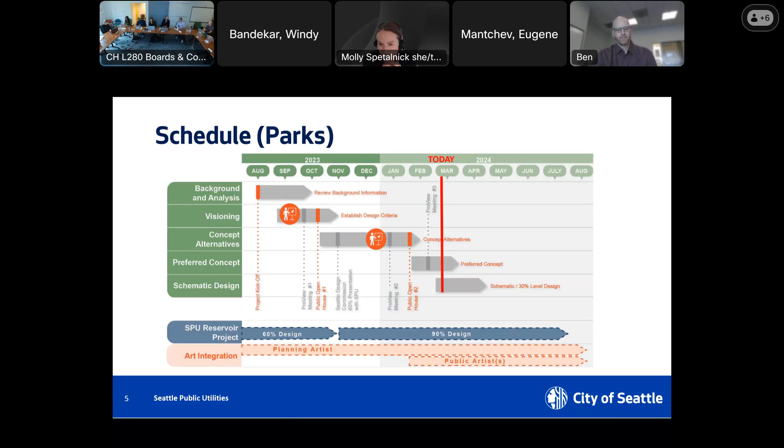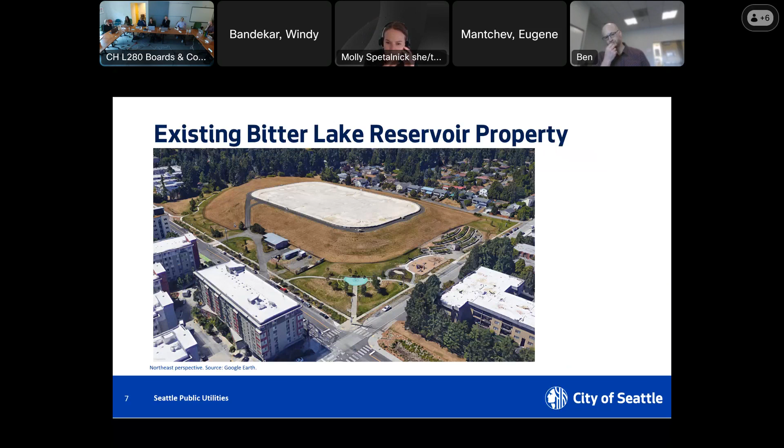And you can see the existing reservoir is built up as an earthen basin on all sides, with a floating cover on top of it right now to protect water quality. And that will all be removed as part of this project.

So a bit on site constraints and opportunities. As we noted, there is city right-of-way on three sides of the project, and then to the west, sorry, that's on the bottom of the sheet, that is Fremont Street North, private residences, and Pleasant Street there. Currently the site is fully secured. That's the large dashed line. It's security fencing installed by SPU, but we will now be removing that as part of this project and opening up the space for public use.

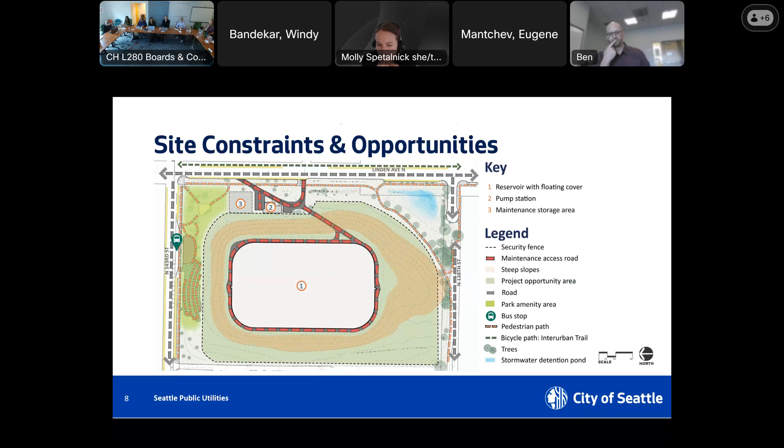We do have large elevation gains that have caused concerns for accessibility, coming up from the roadway grade to the maintenance access road around the reservoir, over 30 feet. And then we also need to be sure with the removal of that fence that we're also improving the water storage security as well as the seismic survivability of the water storage facility.

So to take a step back to some work that we completed in 2021, and then even talk about some work that was done by SPU at a highly conceptual phase back in the late 2010s. We are aware that this is a unique site that offers unique opportunities to the city. It's very rare that you would have a 14-acre parcel with new dedicated public open space become available in the city. I want to note that SPU has been a thoughtful, collaborative, and intentional partner about the design of this new critical infrastructure and the space being provided to the city and to the Bitter Lake community.

So highly conceptual work began in 2017-2018 by SPU. The early outreach efforts we had then were before Consor was even brought onto the project. But SPU learned that both the neighborhood and local law enforcement were not interested in having a fully buried reservoir here. Like similar locations where SPU has water storage facilities that are fully buried, you can't plant trees or shrubbery on top of the reservoir because of potential harm to the structure in the future. And so neighbors saw this as a high potential area for what they were already seeing as a large number of encampments on this property.

And law enforcement agreed that with the difference in elevation from the street to the top of that reservoir at plus 40 feet when the structure is complete, this would not be an easily patrolled area. So there was concern about just creating a large potential campground on top of this reservoir. And then there were also concerns that if we were to fully bury this, there would be accessibility concerns, particularly for the senior housing that's directly across Linden Avenue from the reservoir site.

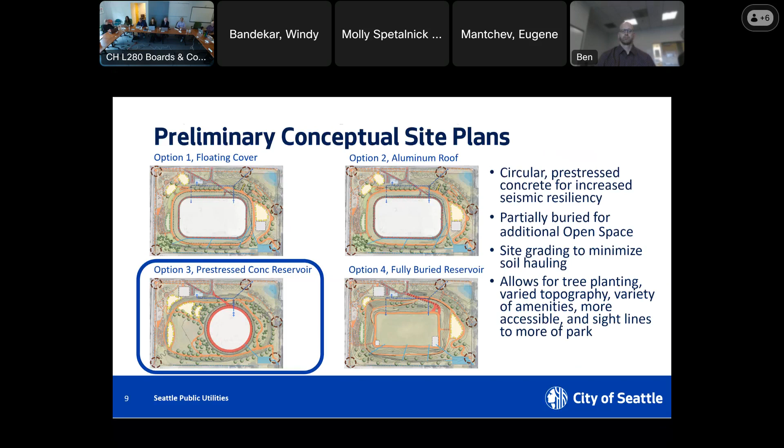It's important too to talk about some of the engineering considerations and constraints that went in as we moved from the options analysis of option 3 and into actual hard designs. What we wanted to do was optimize the tank location on the site, not only to open up the site for as much open space, but we also need to look at minimizing excavation needs.

There's approximately 50,000 cubic yards of material that needs to be excavated from this site, including removal of the existing berm and reservoir. And so by locating a majority of the new reservoir within the existing reservoir basin, we were able to minimize initial soil quantities. That goes along with balancing the cut and the fill quantities. That provides additional soil that may be used for land art opportunities. And I think very important, it reduces the hauling and the truck traffic through that neighborhood.

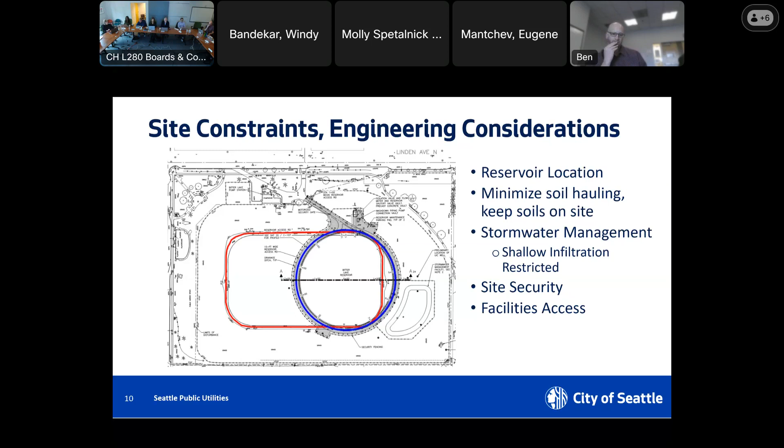Also, with regards to the sizing and the configuration of the reservoir, SPU, in order to meet their system-wide water storage requirements, needs to maintain the existing 21 million gallons of storage on this site. We've talked about it over our last few meetings, but it's worth noting for some of the new commissioners. We've heard the comment, can't we just push the reservoir down into the site to obscure it even further? But in order for there to be reliable customer water service pressure and to meet minimum drinking water standards for the tank service area, the typical operating water level in the new tank must be the same level as it is in the existing tank.

Additionally, if we did move forward with lowering the tank, again, it wouldn't work hydraulically, but know that 1 foot of excavation equals 3,000 cubic yards of material on the site that would have to be hauled or used otherwise.

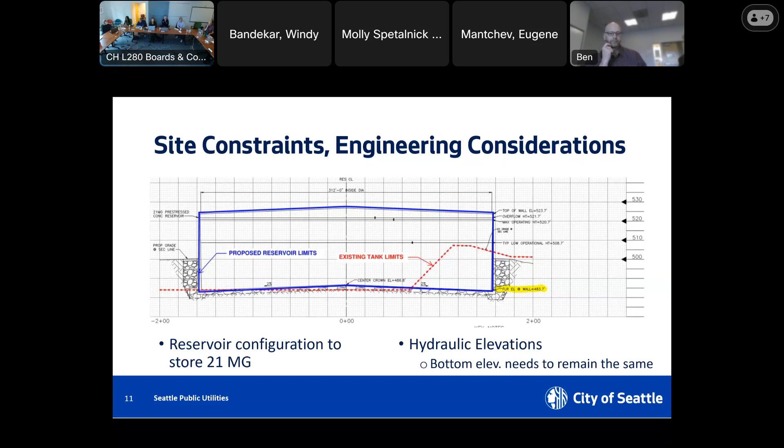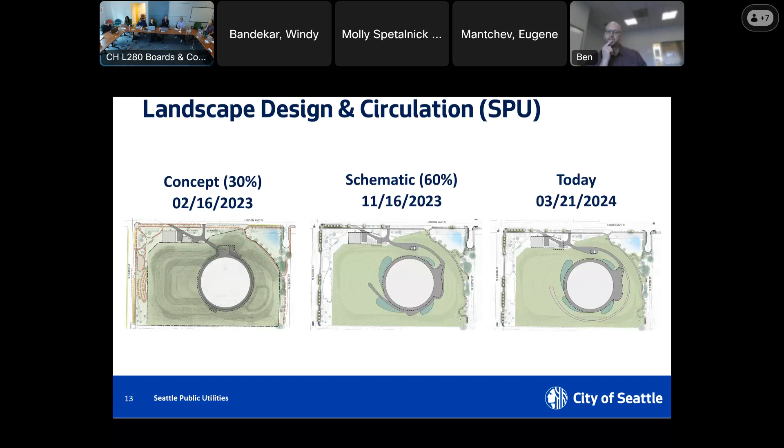Thank you, Lael. So the next bulk of the presentation is really to discuss the landscape design and pedestrian circulation. We kind of lumped these together. And I'm going to go a little bit out of order from the comments that you wrote up from November, mostly just because chronologically that's how we looked and addressed them. So as a reminder, at 30% to 60% to today, this is just a snapshot of SPU's site development progression, incorporating your feedback at each meeting.

One of the key comments that we got back in November was questions, concerns, comments regarding the SPU security fence. We had developed some initial ideas of perhaps enhancing that fence. Kate will talk about that later, but there are concerns about the pedestrian experience, the scale, the perception of that fence if you're near it. And so one of the first things we did right after that November meeting was push this viewpoint path, the circular path around the reservoir, out away from the fence. And we're still able to create an accessible route of 4.5% or less, and still able to get 14 feet higher than the reservoir maintenance road.

That fence will still be a part of the design, certainly, but the scale and the perception of it, I think, is going to be a lot different now. And we're still able to achieve that circular viewpoint and this rewarding experience up at the top. And so this is SPU's current site plan that shows the 4 bioretention cells that swirl around the reservoir, and that viewpoint path.

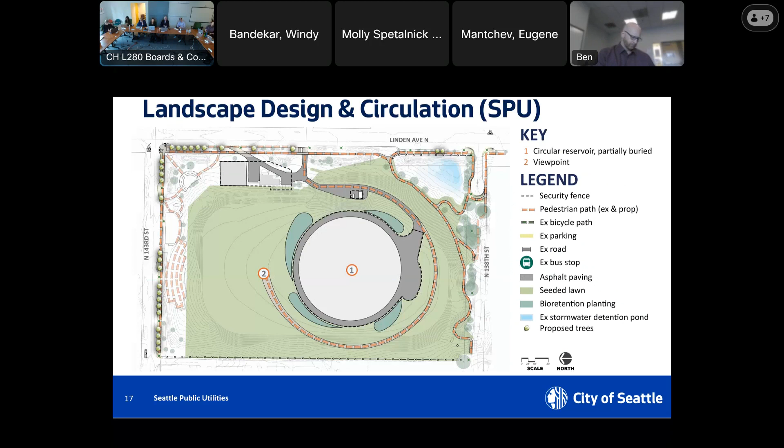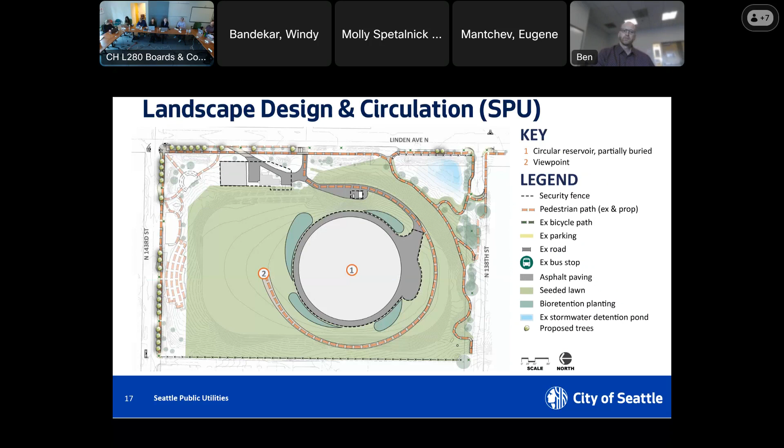This is just a snapshot of SPU's design as it stands now with that pedestrian circulation that wraps around the reservoir, these 4 bioretention cells, the security fence that wraps around the SPU's maintenance vehicular area. And then there are some right-of-way improvements and sidewalk improvements on the north and south and east that we've spoken to in the past. Those remain unchanged.

Before jumping further into the parks part of the project, when we left you mid-November last year, we were still in the midst of our first round of community engagement. So we had some initial ideas and feedback that we shared with you then, but I do want to take time now to summarize what we heard in November. And that was really just a visioning time where we took about a whole month to have a focus group meeting with residents and neighbors. We had a public open house. And that was a chance just to listen to what they wanted this new park space to be without showing them any designs, just showing them the possibilities with imagery, different types of amenities.

And we heard concerns that are similar to what SPU has heard in the past as well, about safety and visibility, concerns about noise, and especially the privacy of the neighbors to the immediate west along that private road, knowing that this is going to be a new park space that will dramatically change their experience, but we're going to keep that SPU security fence along that west side at their request.

Some preferred activities and programming: generally there was a sense of more passive recreation. They weren't interested in large athletic fields or a lot of active recreation. It was wanting to see loop paths and walking paths, lots of trees, expanding the P-patch, expanding the playground, having gathering spaces for the community. The Bitter Lake Community Center just to the south has an enclosed building for community gathering and active recreation. They have athletic fields, tennis courts, pickleball, a new restroom and playground that's being built and worked on right now. So they wanted a sense of different amenities than were just offered to the south.

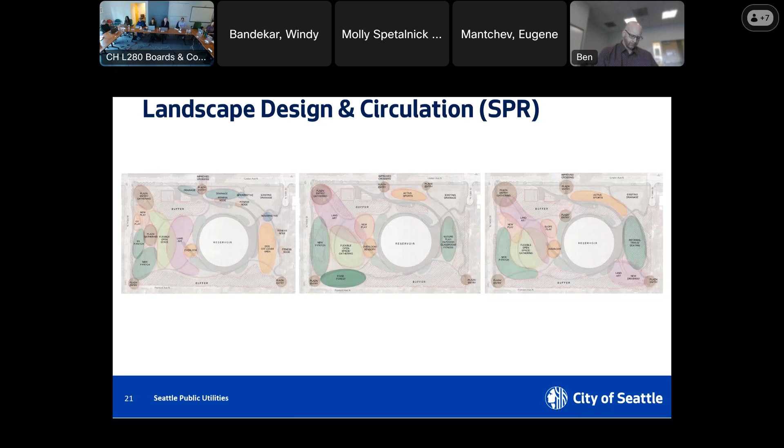And then as you all, as designers, are well aware of and practice on your own, we began just sketching out, okay, if these are some of these amenities, how are they connected through accessible networks of paths, developing a hierarchy of paths, all while incorporating SPU's layout as well.

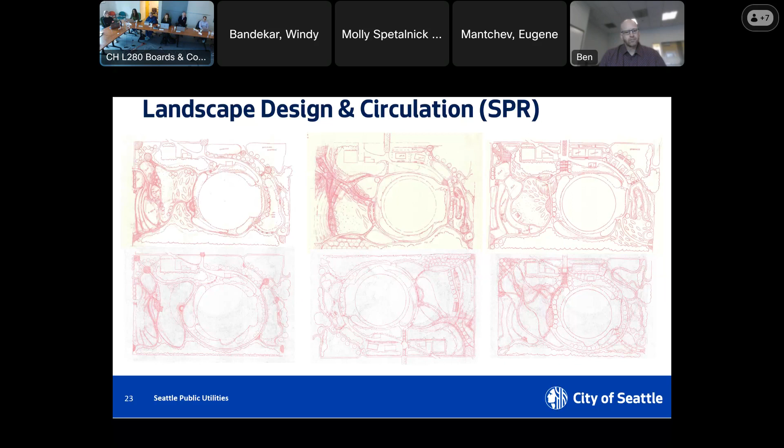And we just continue to refine that with additional sketches, studies, explorations of things that worked well, things that didn't work well. And we wanted to develop 3 concepts that had some similarities, but also some unique differences, and kind of expressed and exhibited a broad range, that they're not too identical. And we further refined those concepts.

And then we wanted to make sure that the public was aware when we produced additional graphics for the second round of engagement, that we had imagery so that they understood, especially for those who English was not their first language, they had imagery to understand when we say or labeled something a dog off-leash area, they knew and understood what we meant by that. Or if we meant informal walking path or trail, they had a vision of what that could be.

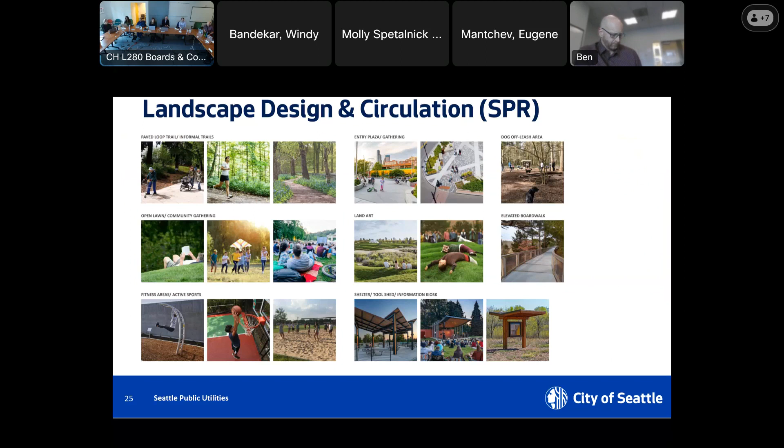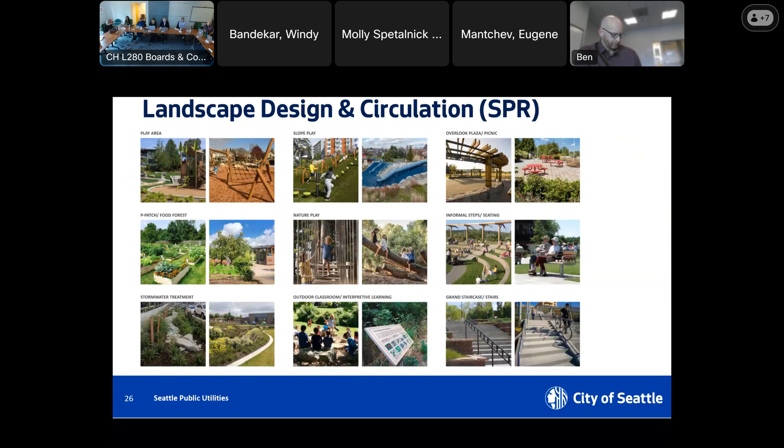So we developed just some simple image boards. This was one, this was another one that just showed examples of what these spaces and amenities could be, not specific designs, but just inspiring images so they could connect plan to image. And then we developed 3 concepts, and I know you've seen these in the packet, but I'm going to walk you through each one in detail, and then we'll jump into the engagement that we did as well.

So the first concept we titled Whirl. This is kind of a lighter approach, more of a minimal approach in terms of amount of amenities and development on site. The first thing that we did was locate an off-leash area to the south of the reservoir. In talking to the community in the focus group, we felt like this would be a really good program space that would bring lots of people during all times of the day, all season long, all week long, to a space that we knew was going to be challenging in terms of visibility and activating that space on the south side. We also know that lots of people already bring their dogs and walk, some off leash, to the space very near here in the southeast corner.

We kept the existing P-patch as is, and we just simply expanded that to the north there. I'm going to see if my cursor shows up. It's a little lagging, so I'll maybe not use that too much.

And then we worked with Kate to understand, okay, if we're going to do a land art, what's kind of the minimum size that would have value to do that? And so we located that near the viewpoint, kind of wrapping around that viewpoint. And then we have some open lawn areas and a picnic shelter for events, kind of located between the viewpoint, the land art, and the P-patch. We have some smaller plaza spaces with better park entries to the northeast corner. And then we have some smaller fitness and interpretive nodes.

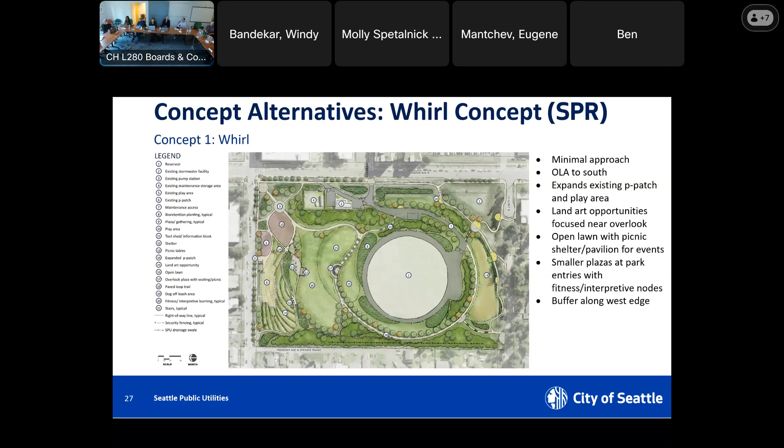In all concepts, we included a buffer along the west edge. And this was just to be able to be sensitive to those neighbors that have had a lot of concerns about noise and visibility into the park, and provide a sort of a transition between that single family housing to the park space. In all concepts, we want to highlight the accessibility of the space because that's a challenge in the topography, but it also lends itself to really unique opportunities as you navigate the entire site, in particular around SPU's looped path here. And this shows just all the accessible routes that you could take at 4.5% or less.

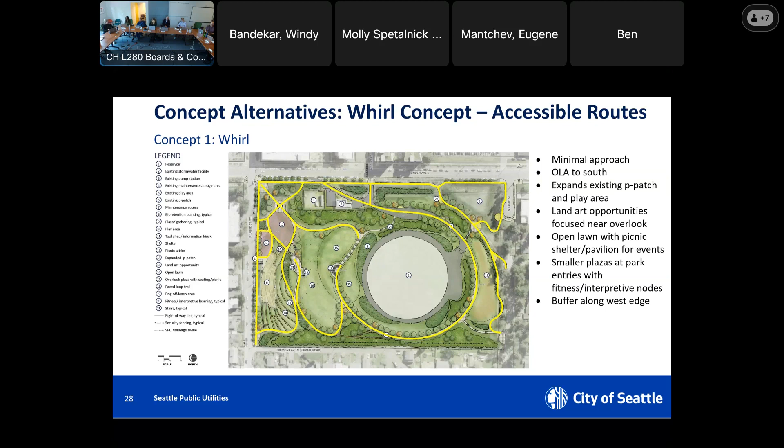The next concept we called Flow. This is a little bit more intensive development of amenities and a network of paths. On the south side, something different here was to introduce a nature play, an outdoor classroom with some fitness areas as well adjacent to that in the southeast corner. This was an amenity we heard some interest in from the community, to be able to have more trees and more forested areas there to the south. We have a larger plaza in the northeast corner to really welcome people in on that.

The current one is really small. It's kind of hard to even see into the existing park space on that northeast corner. We, again, keep the existing P-patch, but we expand it on the north side. In this case, we move the play area closer up to the viewpoint in thinking that there'd be some slope play, slides on berms and things like that. And we increase its size.

We have a staircase from Linden that comes up. In all concepts, we do want to encourage and promote this idea of a mid-block crossing that actually is perpendicular to city right-of-way there, but it just dead ends into our site. And instead of forcing residents on Linden to go all the way around to the corners, we want to encourage a mid-block crossing that can activate kind of this middle part of the site on the east side.

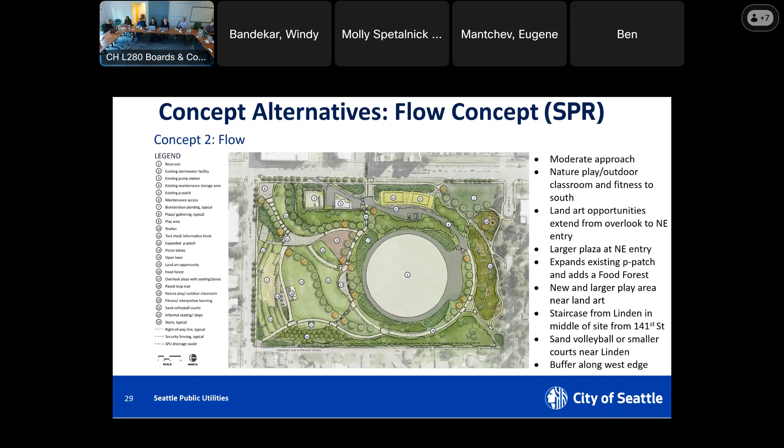Also mentioned, we included a food forest adjacent to the P-patch. This was something we heard from the focus group. Some of the existing P-patch users are really excited about this opportunity and feel like they could champion its ownership and its maintenance, similar to the food forest that's on Beacon Hill. Here's the accessible network here.

The last concept is the most extensive in terms of the approach. In this case, the land art opportunities, we just wanted to show something different. And here we showed it kind of stretching from the northeast corner all the way to the southwest corner, just to see what the community thought of that. Hearing Kate's thoughts afterwards, after we've had some time to kind of mull that over, has been helpful.

In this case, we have an entirely new P-patch. And the only reason to do that was to see if the community was open to it first, but also the existing P-patch is not accessible. So to make the entire thing accessible, we'd really have to redo all of it. And so this was just a test, just to kind of gauge interest to see if the community was open to that idea. We have a grander staircase off of Linden.

In the southeast corner, there's an existing stormwater pond there that we really cannot do much with because of how much stormwater we have to retain on site and infiltrate. And it's one of the few existing spaces that already serves that purpose. So we can't do a lot with that, but it's a corner of the park.

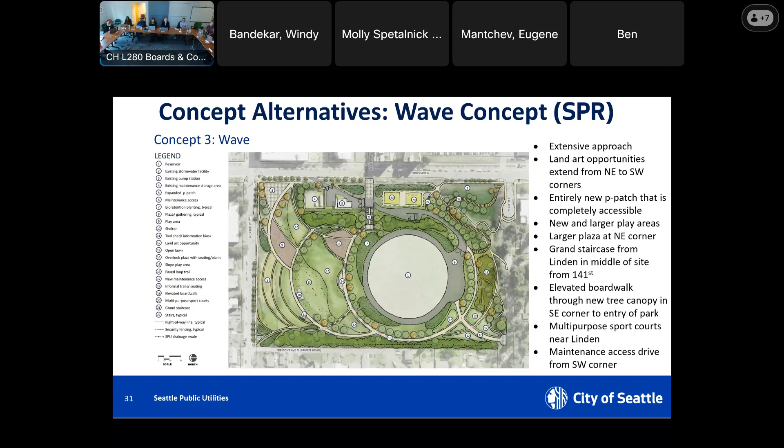We included a couple multi-purpose hard surface sport courts on this option off of Linden there to the east. And then we also included a maintenance access drive from the southwest corner, thinking that we want to enlarge this entrance a little bit, have better connections east and west, and make that entrance to the park in the southwest corner better, more inviting, as well as serve the mutual purpose of potential SPU as well as parks maintenance access. So it's not limited to just the one access point off of Linden. Here's the accessible routes on that.

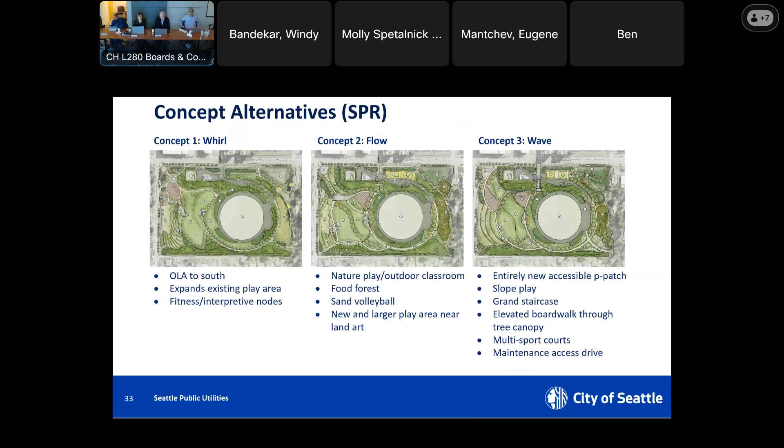So this is a slide we could return to perhaps during discussion or comments, but it just shows all three at once and bullets out some of the unique attributes between them. And again, you can see there's a lot of similarities. That's partially on purpose. During the community engagement, when we talked with people, we weren't expecting that we're just going to pick one of these and go with it. It was always going to be this sort of combined effort. What did you like and didn't like of each of these?

So that chronologically leads us to kind of the beginning of February after some intense planning. And we worked on the community engagement, kind of a second round of input. We developed these three concepts, these image boards, and wanted to come to the community and ask them for their feedback. And this was a really exciting time that we partnered with Arts and SPU for a collaborative effort.

We understood that from the community's perspective, they are going to see this as one project. It's the city doing something. It's not three separate departments. And so we took lessons learned from the prior engagement phases in terms of what worked well, what didn't work well. And in this case, we took the whole month of February to have an online open house and a survey, fairly traditional in that sense, where we had combined materials for parks, SPU, and arts on that open house and survey.

And then we had a number of events where we went to the community where they already were, where we knew they were going to have an event, like a pancake breakfast or the food bank or certain businesses or certain residents, and we just went to them. We coordinated with those owners and just set up times. And in some cases, it was door to door even, or just a tabling event mid-February where we were just out at the park on a weekend and interacted with lots of people walking their dogs and with kids and things like that.

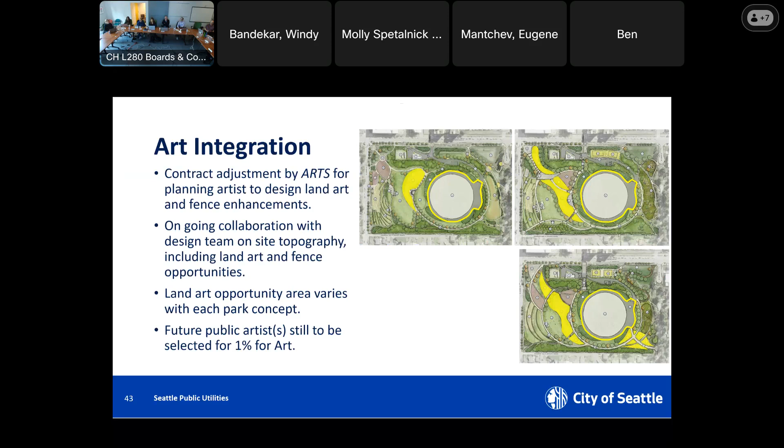Another thing to think about is, of course, this type of a treatment is the most fun in the summertime for play and rest, though early on, lots of people were saying when they heard that all of this new park space was opening up and that there were going to be these hillsides, wouldn't it be fun to have sledding? So who knows what's going to happen with climate change, but there may be some winter activation of that as well.

So another thing to think about is along with physical interaction, this type of treatment also becomes an interesting visual experience for all of the apartments that are around that corner. As the sun moves from east to west, you start to have all of these shadow changes, which I witnessed at the Johnson Pit number 30, a really interesting dynamic that changes throughout the day.

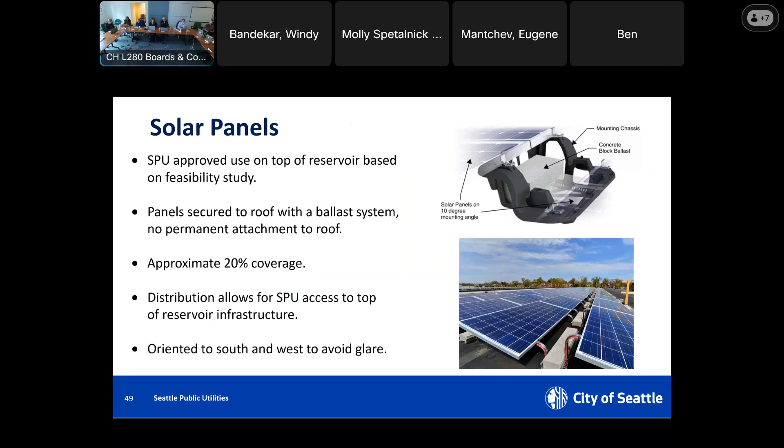So how does the system work? Basically, there are 2 different sizes or opportunities that Seattle City Light provides. With the footprint that we have, we're developing approximately 100 kilowatt hours from the system. What this does is it generates enough power to offset approximately 80% of the site's future power use. What they do is they install a replacement bidirectional service meter.

And so it's not for instantaneous use at the site. What it does is we feed power back into the grid, and then SPU is taking power from the grid. And so every month there's a credit that's provided to SPU for it. And so it's a nice fortunate thing for SPU too. It's about a 15 to 20 year break-even point for the installation of this. And the panels themselves have about a 30-year lifetime right now.

What we are proposing to do is to include this as a separate contract after the construction of the reservoir, just because technology changes so fast. And then what we will be doing with the final design for the reservoir project, though, is installing all of the conduit, making the place for the new service meter, getting everything prepped. So we just need to run the wires, if you will, up to the solar panel installation on the roof.

So that concludes our presentation today. So thank you, design commission. Everyone else here, if you have any questions, we're here to answer them. Thank you.

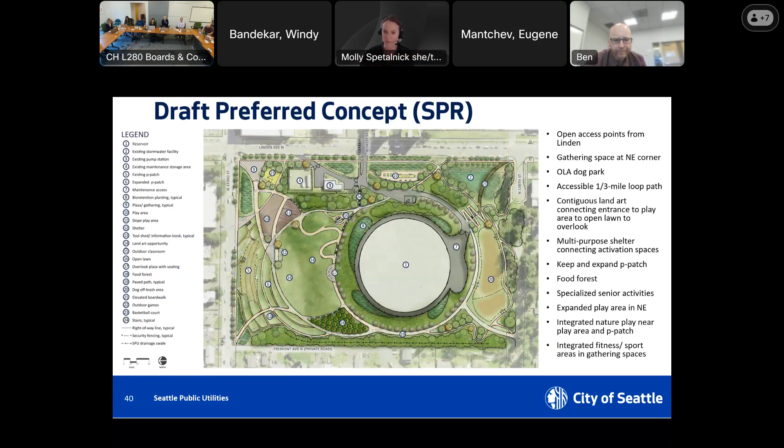Yeah, it's something that we're going to continue to work on in refining the design. Some aspects of it are stormwater for SPU, as well as in the future parks. Because of the low point along that edge, it actually serves as a pretty good spot for a stormwater swale along that fence line almost. It's shown in the graphic here as a black dashed line. And then we'll have trees, but of course the underlying vegetation will need to be kept lower so that it can be seen underneath and kept open as much as possible.

Great. Thank you so much. That's it for me, Kevin. Okay, thanks, Molly. Phoebe? Great, thank you.

Thank you all for really the in-depth presentation. It's fun to see. So I just numbered my questions here, so I'll try to get through them. The first one is kind of an easy one about the plaza and play area. They both appear to be completely new, is that correct?

Yes. And so then my follow-up question to that is, you've moved the play area a bit, but it's more or less in the same location, and the plaza is the same location. Did the team explore moving those areas? Like perhaps expanding along that corner or thinking about Linden? I'm just curious, were there other sites considered?

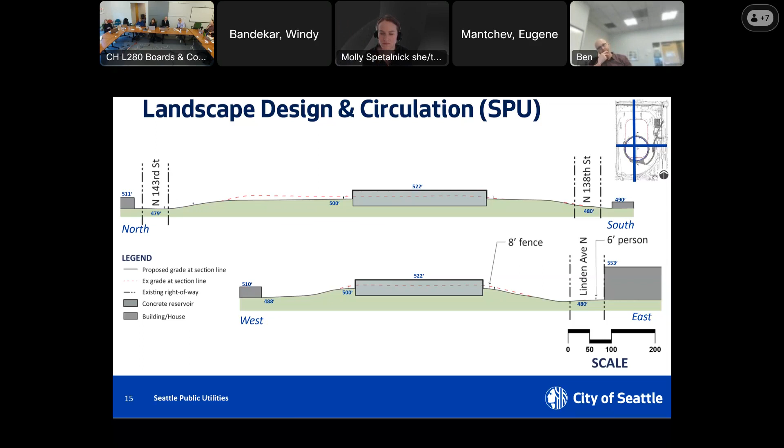Do you have the contours in mind? Yeah. Let's go to the slide with some contours that might be helpful. They're not elevations, but it might give a better idea. Well, that's kind of the rough grade probably at this point, just to get the viewpoint path in. Generally speaking, we don't have a lot of flexibility to alter the grades on the east side because we're kind of sandwiched between the access path and SPU's facilities in Linden. We just run out of space.

Similar to the west side, we're trying to kind of push that grade towards the single family housing a little bit just to get the path accessible and there. But we don't want to create hiding spots down there either. The south and the north side have more flexibility. South side kind of does a bit of this plateau element. The nice thing about the off-leash area is that it doesn't have to be completely flat. So that gives us some flexibility to have that slope a little bit. Also, it's helpful for drainage to slope that for treating that area.

The northern half, you basically have it right where we have the pea patch that's terraced already, and then we continue to terrace it a little bit, and then it flattens out where we have the lawn area and picnic area, and then it starts to climb again. And that's where the land art will start to really come into play. But we have a full 3D model, and we could definitely give you snapshots and sections next time. Okay. Yeah, that'd be great to see.

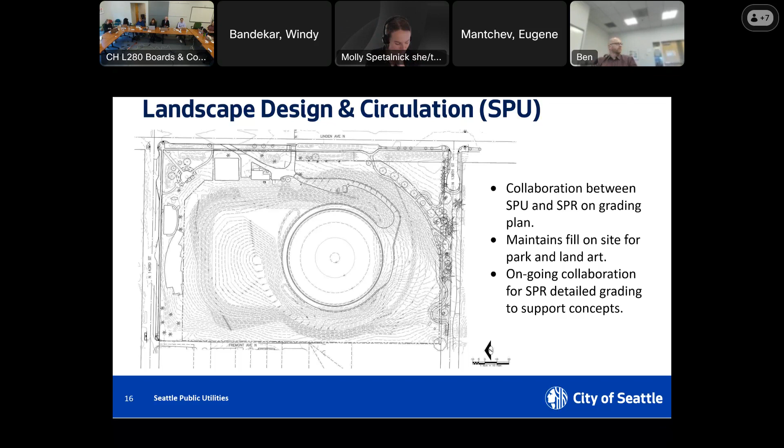Thank you. Okay, I'll just wrap up with a couple of hopefully quick questions. One, if you could go to the preferred concept, the accessible pathway graphic. Great. Also sort of a question about timeline. So with the SPU project, you've talked about how the pathway for your project has evolved. And then this is obviously a much broader circulation system. So how would this all be constructed or phased together ultimately? How do you see that all happening? Because it's an impressive system overall, but how would you see it being implemented, all at the same time?

So ideally, what would happen is with construction, our contractor would go out there, build the reservoir, and then we'll be doing our final grading towards the end. So we'd have that viewpoint path coming up, and then we kind of indent that. And ideally, once we're done, the parks contractor would come in right after that and start developing the park. Okay. So you would see that one path being done first? Yeah, first. And if for some reason there's time between that, we'd probably have to do some seeding or some temporary erosion control, and then we'd have the path, or if we opened up the site, people could use that path. But ideally, they'd be right after.

Okay, and then the only other question I have right now, on the Parks project, and I know it's early, but I think we mentioned this back in November. Linden is part of the Interurban Trail. It's a really important regional facility. So will there be bike parking along Linden or as part of the program? Yeah, that certainly has been on our mind, knowing that this will be a stopping point along that trail. In addition to just racks, there could be other amenities that are helpful for bicyclists.

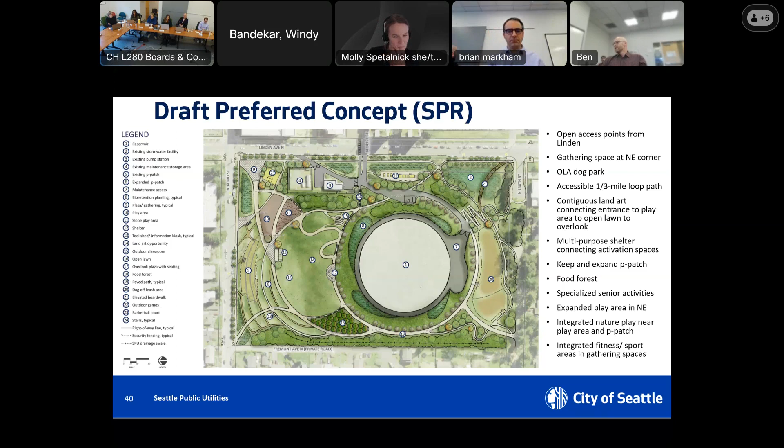One of the things I didn't say, and this is something that the commission tries to tackle in the policy that we have on equity and the design of public space and what we expect to see at the departmental level about how RSJI informs the work that you're doing. That kind of work is what we expect to see in all the things that we do. We don't always necessarily get to see that, but that threshold that you establish is notable.

In terms of going to where people are, doing that as opposed to making them come to you, and doing it in a meaningful way. So that's the kind of thing we expect to see in projects, and you guys rose to that. And so thank you very much for doing that. So a nice threshold for SPU as well and other work. Thank you.

Apparently this is my day for making it offhand. I didn't want that to go away because it really is important to the commission to see city departments rethinking what equity actually means in engagement. And that's the kind of thing that I think that we want to see, and hopefully it's institutionalized in other parts of SPU. Yeah.

Yeah, I'll actually be able to give a short presentation to the Parks Department and all of their project managers to kind of give a picture of what this experience has been like and things we've learned. So I hope to sprinkle those seeds of things we've learned. And thank you.